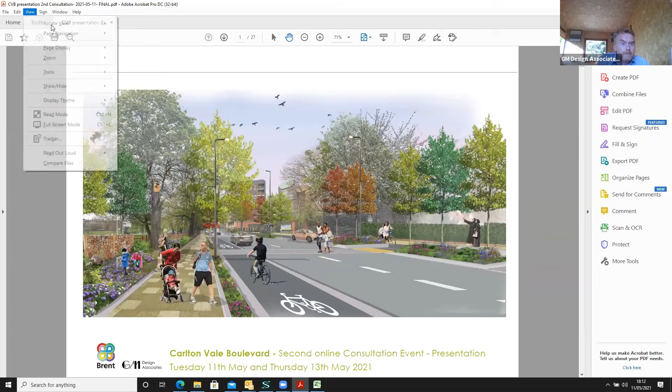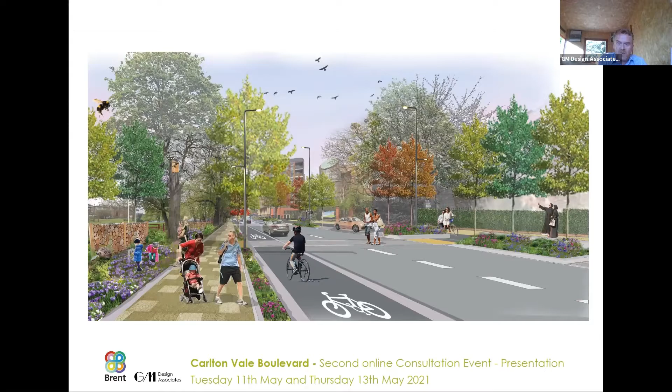Okay, let's make this full screen. So this is our second online consultation event for the Carlton Vale Boulevard project. We're having one event tonight on the 11th of May, and then we'll have the same format of event again on Thursday of this week as well.

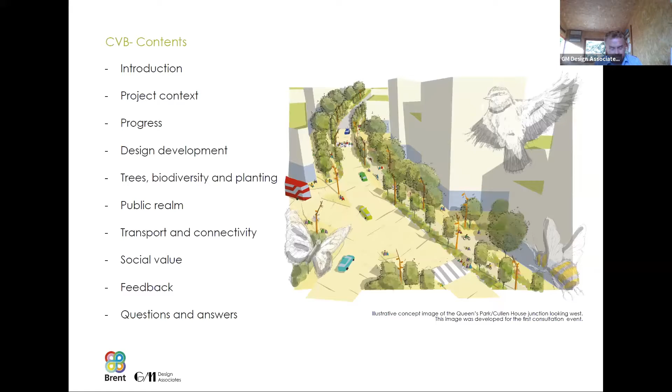Just to give some project background information and look at the purpose of tonight's event and the project team: the purpose of this online consultation event is to inform and engage local residents and stakeholders about the design proposals for Carlton Vale Boulevard. This is a really exciting project that aspires to transform Carlton Vale in South Kilburn into an ecologically diverse, tree-lined avenue with reimagined public spaces and improved transportation links.

The Carlton Vale project is being led by the London Borough of Brent, and the council has appointed ourselves, award-winning consultants GM Design Associates, with over 30 years experience in landscape architecture and public realm strategies. To progress this project and work through the designs in detail, we've assembled a strong multidisciplinary team of consultants to ensure a high quality scheme is delivered in line with the aspirations of the 2016 South Kilburn Master Plan and the SPD 2017.

This team includes the Steer Group, our transport consultants; Price Myers, structural and civil engineers and flood risk assessors; Couch Perry Wilkes, mechanical and electrical engineers; the Ecology Consultancy; DustScan, air quality consultants; and Currie & Brown, quantity surveyors who look after the cost plans and budget for the project.

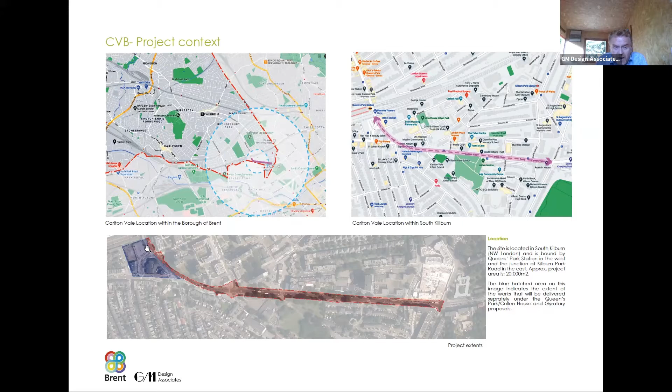Our overall project area is about 20,000 metres squared, and you can see from the aerial photograph that we've outlined the project area in red. To help with bearings: Queen's Park is in this location, the mosque is located around here, South Kilburn open space is here, and Kilburn Park Road is here. One interface of our project is the current gyratory site for the Queen's Park and Cullen House site, highlighted in blue to the west of our site here.

Okay, just to set the scene in terms of the master plan context. The regeneration programme for South Kilburn is guided by a master plan. The council appointed an urban design-led team to undertake a comprehensive strategic master plan review in collaboration with the community, which was completed in 2016 and adopted in 2017.

The master plan defined 8 spatial principles for the South Kilburn regeneration. Principle number 1 is Carlton Vale as a tree-lined avenue and spine for the area, animated with green spaces, retail and community uses. That's critically important - one of the guiding principles within the master plan of this tree-lined avenue or boulevard, this tangible green infrastructure space that creates the spine running through the whole master plan.

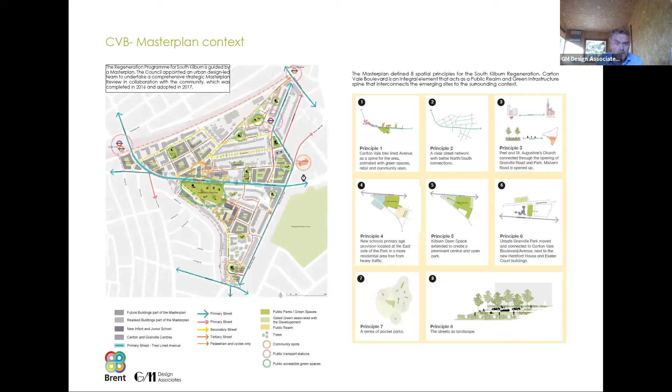In terms of our progress, following on from the project inception, we've been progressing well with the proposals of the Carlton Vale Boulevard project. We follow the RIBA plan of works, the overarching guideline for architects and landscape architects for the various stages of work. We're nearing the end of stage 2, the concept design stage, and we'll complete stage 3, spatial coordination, by the end of the summer.

In terms of the process of getting a contractor on board to build out the works, that procurement process will start in winter 2021 and complete by April next year. We aim to start on site in spring 2022 with envisaged completion in spring 2023. These dates are subject to change, and any change will be communicated with the community and all stakeholders.

In terms of consultations, we held our first consultation event in December, followed by our co-design workshop in February. A few attendees this evening were at the co-design workshop - it was a very lively, engaging forum with a lot of debate. It allowed everyone to provide input into the proposals, and we've taken many of those comments on board and factored them into the design work you see this evening.

Key themes emerging from the consultation process focused on traffic flow and parking, cycle lane provision and connectivity, street furniture and its detailed design, lighting and ecology and how those influence each other, tree species, safety and security, and the nighttime economy and how that will bring Carlton Vale to life in the evening. Questions were also raised on maintenance of the project and how it is being funded.

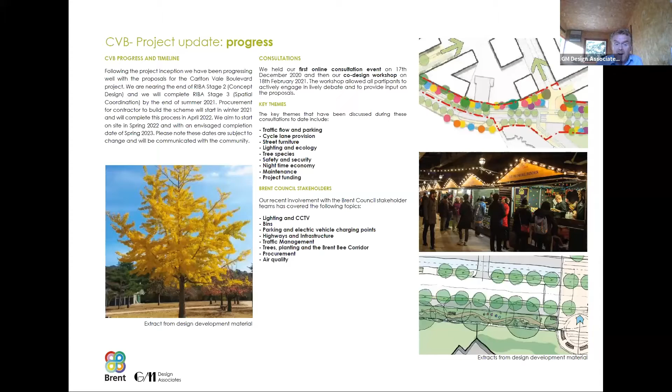Okay, I'd like to now pass over to my colleague Marcus Shields, who will present some of the drawings here. We've got 4 drawings and some visuals, and Marcus will talk you through the design development and some of the ideas that are emerging and some of the design approaches that we're taking.

Thank you, Chris. Working with the principles of the master plan and initial consultation and design stages, we've really started to look at the detail and the type of elements and materials which will be contained along Carlton Vale. We have 4 drawings, which are a little bit more detailed than when we last presented, and the 4 drawings run from Queen's Park to Kilburn Park Road, so left to right, west to east.

It's important to note that these drawings show a combination of existing buildings, but then they also show buildings which will be delivered as part of the master plan.

This important area, round the Falcon Pub at present, where Marks and Spencer's is on the northern side, will see extensive changes there, where the mouse is just going.

The key change in this area will be removal of the Premier Gyratory. Now it's worth saying that the removal of the Premier Gyratory is a separate project to our commission, but certainly something which will be delivered as part of the master plan.

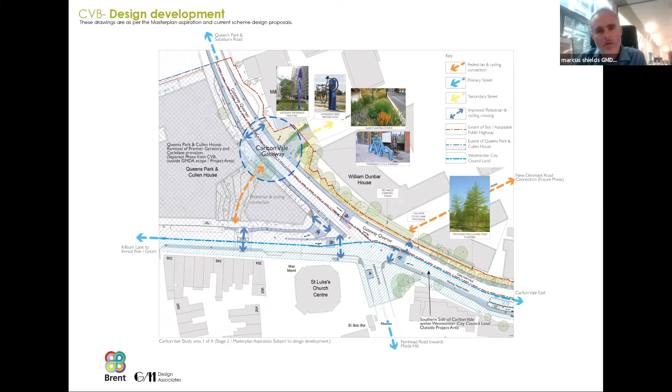So this is really starting to become the boulevard in its entirety. So this is quite an important space. I suppose Carlton Vale changes as it goes along the length, and it's worth saying that anything we're doing is a continuous treatment, an end-to-end treatment, to make sure there is continuity within Carlton Vale itself. If you go to the next slide, thanks, Chris.

One of the key interfaces on the southern side is the interface with South Kilburn open space. We see this as a fantastic opportunity to draw nature from the park into the street. And then around Malvern Road, it becomes more residential in character on the southern side of the road.

Outside the mosque, at the Rupert Road, Malvern Road, Canterbury Road junction, we foresee an opportunity to create a civic space, or certainly an improved junction. What we're looking at is this space being flexible public realm to accommodate a number of uses, whether that's pop-up stalls or small-scale markets.

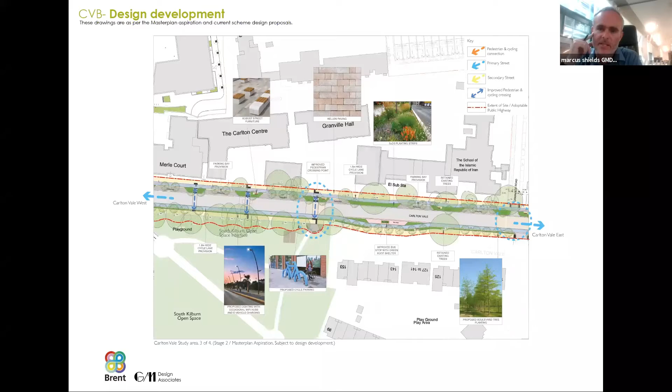Here it remains in the same place, but we are looking at potentially incorporating a green roof, which is something we're discussing with TfL at present. If I go to the next slide, Chris.

This is the far eastern end of our site. To the north here, we're reflecting the Hereford and Exeter proposal as the master plan shows it, and we have the Gloucester and Durham, which is just due for completion. So it's quite an important interface.

The Granville Urban Park will be created as part of the Hereford and Exeter development, and we're suggesting that will very much spill onto Carlton Vale and enhance that space. So we're suggesting an improved junction here and improved cycling facilities down past Franklin House and Chase House.

We've already met with the Hereford and Exeter team, for example, and we know there's a requirement for loading in Carlton Vale for their development. So those have been incorporated, and we're doing that with all the teams working on the master plan.

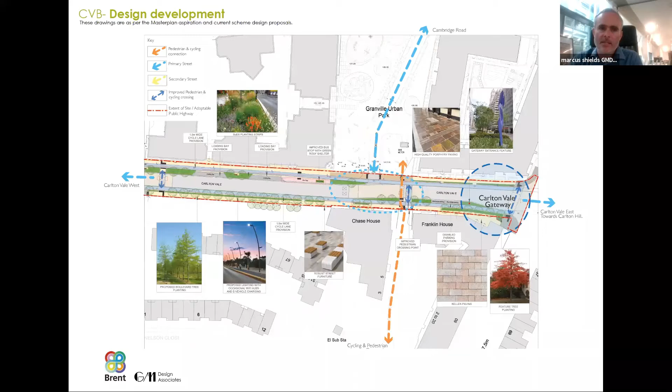Then as we exit Carlton Vale, or as you enter Carlton Vale coming down Carlton Hill, we're suggesting there will be another gateway feature, something which very much identifies Carlton Vale as a threshold of that transition in Carlton Vale.

In many respects, Franklin House, Chase House, and Gloucester and Durham are almost complete, so the kind of active frontage created at this end of Carlton Vale is probably more complete than elsewhere. Again, we have the continuity of the 2.5 metre strip, which actually changes...

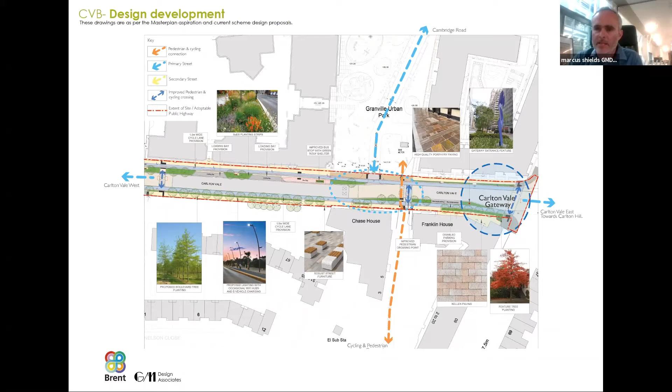It refers to the southern side of the carriageway, which allows us to retain the existing blue badge parking bays. That's fine, Chris.

As part of the commission, we've been looking at some visualizations or representations for the project. We commissioned some drone footage which gives a very good aspect to see the linear nature of Carlton Vale - it gives that elevated aspect.

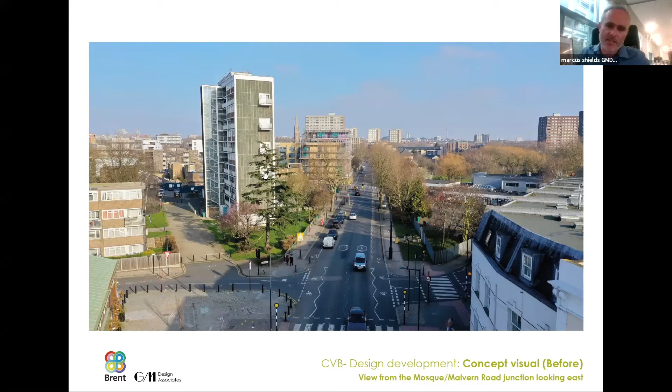If we go to the next slide, we can look at the visualization. This is really a concept visual for the types of materials, seating, and activity that respond to the initial design stage, creating this very strong tree-lined boulevard with public realm space that ties together the three streets.

It's worth saying it's not a shared space - it's quite clearly delineated. Paths, carriageway, and the roads themselves are delineated as they enter Carlton Vale. So these visuals are very useful tools to help things move forward.

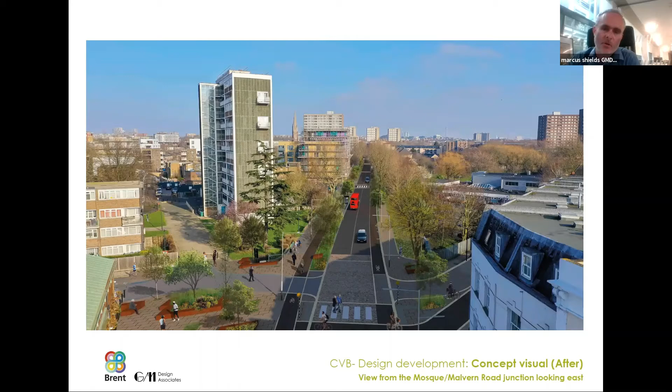Previously we presented the cycle infrastructure being on the northern side, or the left of the carriageway as you look at the screen, and there's obviously an evolution of that with flow cycle paths. Go to the next slide, Chris.

The residential apartment sits left next to Malvern Road. So if we just pull up the other slide then.

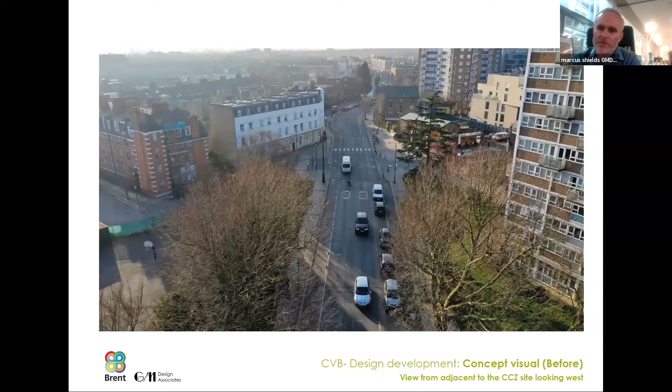Yes, and this looks very much as a kind of broad brush or conceptual treatment of how that may look. I think these images are really helping form the design for us and inform the materials as we move into the next stage. It's worth noting that the bus stop will remain, and in this image the trees are remaining in their current location. The foreground to the left-hand side of the image is within Westminster's jurisdiction. Parking and bus stop will remain as currently on site.

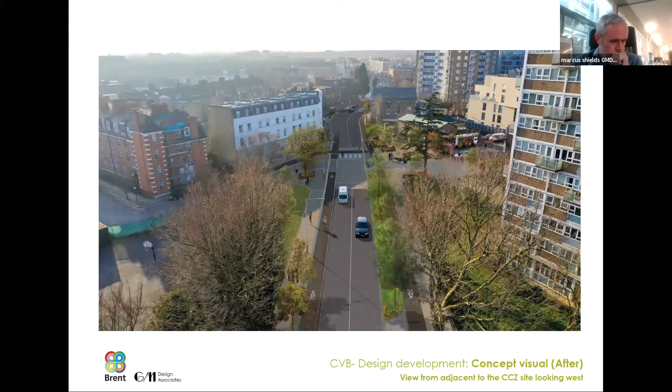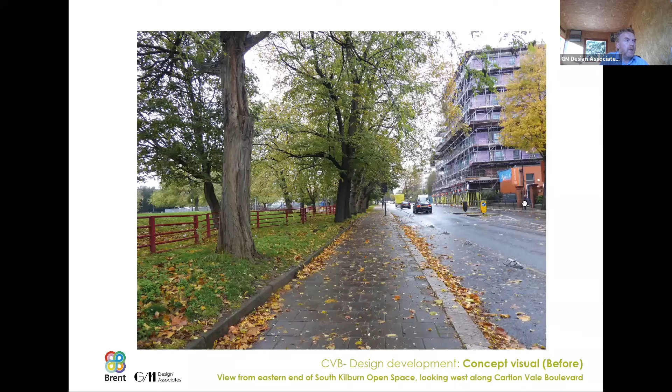So this is one of our visuals from the same location. You can see really the energy and the aspirations of our proposals here, and I think this image really gets across the essence of how we're wanting to approach the development of the project - how it can really revitalise the public realm space and the spaces all around Carlton Vale.

On the left hand side of the image, we've been working with the regeneration team and the parks department within the council to look at how this space can be completely naturalised off the edge of the footpath, with a lot of new species, new ground cover and low to medium height shrubs growing under the tree canopy. We're looking at species that attract wildlife, attract bees - you can almost hear the bees buzzing on this visual - and increase habitat for wildlife, with bird boxes and bat boxes within the trees along the edge.

The footpath itself will be completely resurfaced for the whole length of Carlton Vale, creating a warm blend of colours that will help lift the footpath areas. Between the footpath and the cycleway, we'll have a strip of planting with raised edges to give the planting some protection. You can see our new light columns that will shine light onto the footpath and public realm areas, and onto the carriageway and cycleway areas as well.

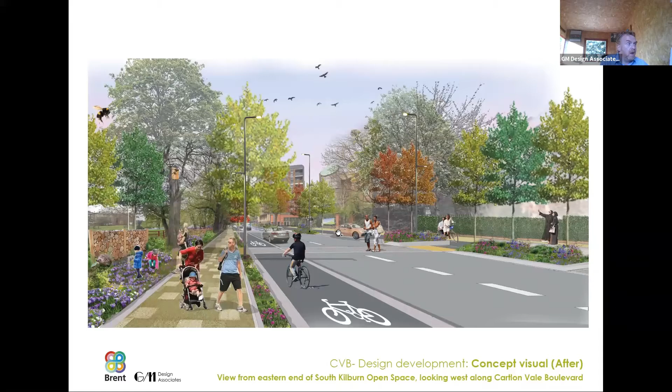In terms of another visual, this shows the view from the public realm looking at the Hereford and Exeter development, looking east along Carlton Vale Boulevard towards Kilburn Park Road.

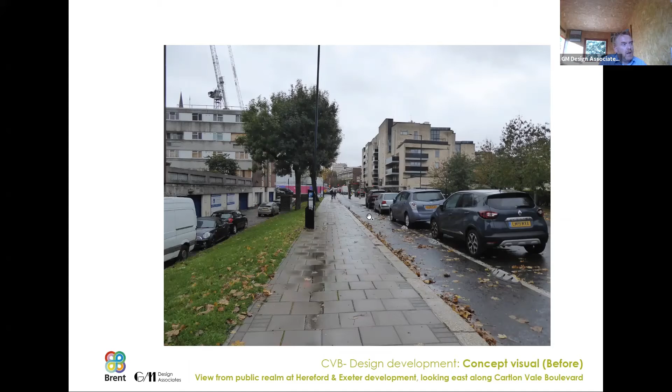You can see the existing surface on the footpath, a standard concrete paved surface, the existing curb edge, the current cycleway provision, the parking provision, and the carriageway area.

This visual shows our design intent for where the public realm will be, where the cycleway will be, where the SUDS planting beds will be, and the carriageway area. The area in white delineates where the new Hereford and Exeter facade of the building will be.

It shows how our public realm will interface and connect directly with the ground level of these new residential and commercial developments. The paved surface will be a warm blend of materials, occasionally crossing over to seating spaces surrounded by an abundance of new planting, whether new tree planting or new ground level SUDS planting.

The planting on the ground level will be very naturalistic and geared towards attracting wildlife. The trees will go in at a very mature size, and this visual gives a good impression of how the creation of the boulevard will be achieved.

You can also see the cycleway provision, which will be one directional on the northern side of Carlton Vale. This gives an indication of where the paving will form the parking bays, loading bays, or bus stops, and you can see the lighting shining onto the public realm and onto the carriageway.

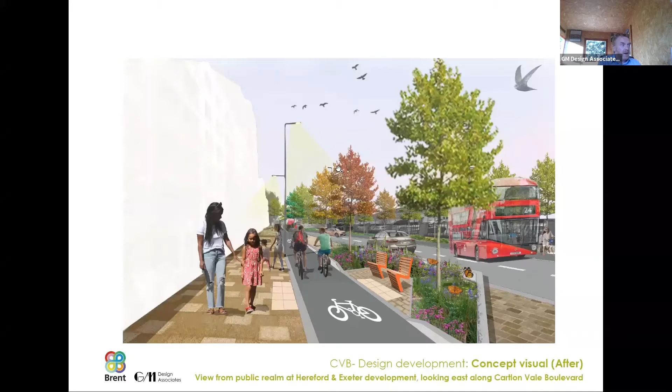So if we could now pass back over to Marcus to take us through some of the slides on trees and biodiversity and planting, the public realm, and some of the transport and cycling infrastructure.

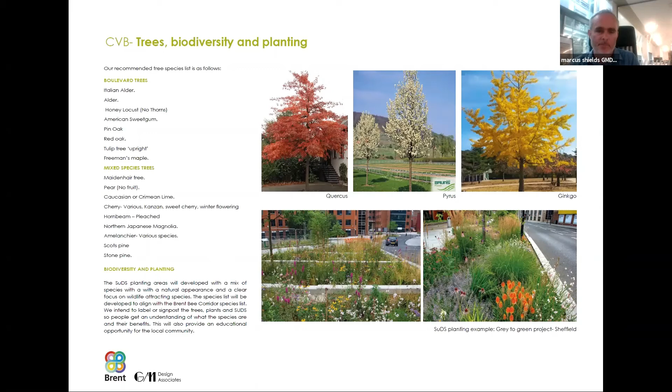As we've mentioned before, we're now getting to the point where we're considering materials. We had said these spaces will be defined with natural stone, and that will change to materials such as Kellen as we go down the boulevard to define the boulevard itself. The important thing is these spaces are quite multi-use, incorporating a variety of activities.

So we're looking at incorporating seating and street furniture, lighting, to ensure they're activated. There's also potential for these spaces to have something slightly bolder, such as a pop-up market or small-scale concessions to activate the space during the weekend or during the week with markets.

In the visuals, we're very much saying the street furniture is a key part of the scheme, and we're going to try and avoid lines of bollards. We're going to use street furniture and level changes, curbs, etc., to ensure vehicles are kept off the public realm.

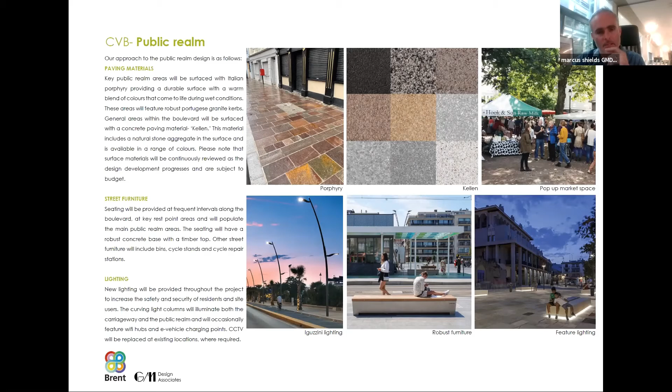We were very much designing the street along the lines of the healthy streets approach, a modal shift from driving to public transport, walking and cycling. This will be achieved by the fully segregated cycle lane.

For the cycling infrastructure, we're very much referencing the work that's been done in Waltham Forest, a very positive modal shift. The most famous example is Orford Road, with its nice image of planting and families cycling, as well as the cycling infrastructure, which will be clearly delineated.

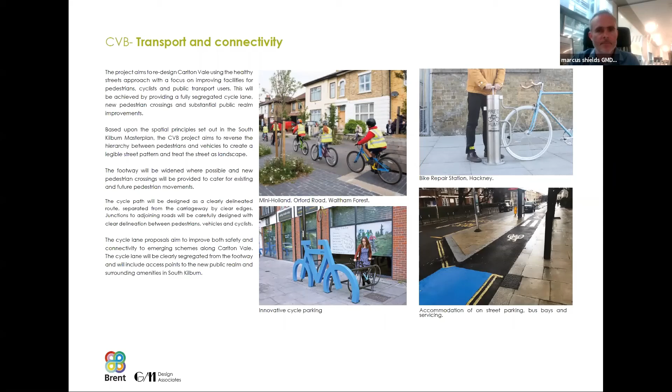We've covered the cycle lanes a second ago, but yes, the delineation of the cycle path is one of the key aspects. It was one of the aspirations of the brief to have that separation between cycling activities and the carriageway, and that will very much engender that kind of cycling culture.

The orcas are being proposed for removal, and we're suggesting they will be replaced with either the planting strip to the north or the upstand curb, which will delineate the carriageway.

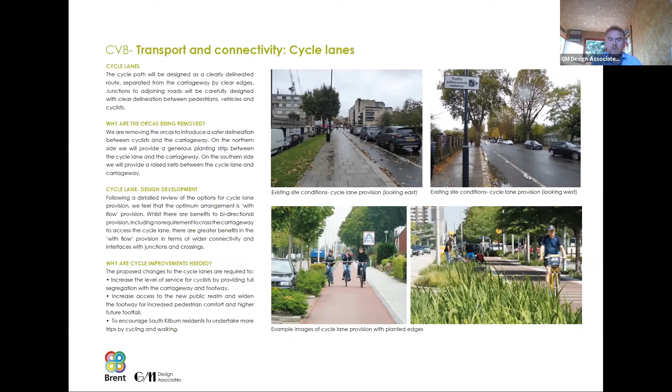If we could now move on to the social value aspect of the project. Certainly on this project we've got quite a variety of social value initiatives. It's been a very exciting and interesting part of the project for ourselves, and it's been great to have that close involvement with some of the residents and stakeholders, to do something a bit different, get them engaged in the project, set up a bit of a legacy and some innovation as well, looking at different aspects. There's been a very good response to some of the aspects we've asked residents to be involved in.

Those practical sessions will continue during May and August. We're currently working with the regeneration team to look at plans to set up the South Kilburn Community Apiary, and we're going to be donating 2 beehives together with protective clothing and equipment for beekeeping. This will set up a bit of a legacy project located within the South Kilburn area, developing an apiary that will continue on in the future.